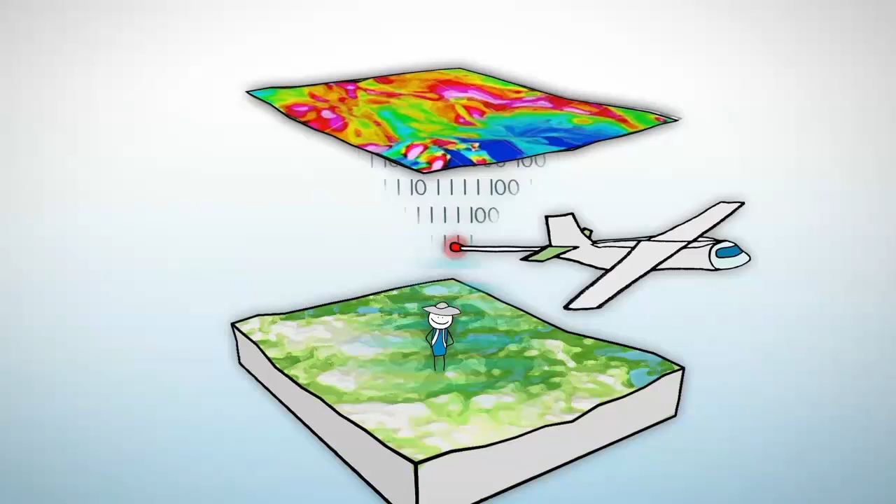Since the 80s, discoveries of surface mineral deposits have declined markedly, but emerging technologies and trends have facilitated the exploration of subsurface deposits. 3D inversion of geophysical data has become increasingly important in exploration because it gives explorers the ability to transform 2D magnetic and gravity data into detailed subsurface 3D models so they can really start to understand the structure and processes of what's beneath the surface.

Collaboration between geologists, geophysicists and geochemists has extended the capabilities of such mapping and analysis, allowing us to make the best possible exploration decisions. Inversion is a powerful tool, but until now, running inversions has been time-intensive, requiring massive resources and specialised expertise.

Some time ago, we began thinking about how we could enable every geophysicist working anywhere in the world to perform inversions in minutes, not hours or days. To meet this challenge, we created a cloud-based 3D inversion service called VOXI.

We streamlined our inversion algorithms, optimizing them specifically for the needs of exploration. We parallelized the process so that it could be scaled across large clusters to achieve the best possible performance. Then we turned to cloud computing to access an almost unlimited number of computing cores. And we organized the cloud so that every explorer can get their very own cluster on demand.

With VOXI Earth modeling, explorers with a regular internet connection can now run big inversions from the office, from a hotel, anywhere with a reasonable broadband wireless connection.

In building our VOXI service, we chose to partner with Microsoft and take advantage of the Microsoft Azure platform. Azure provides a scalable, state-of-the-art, globally accessible cloud infrastructure that we can rely on. The cloud service is efficient and flexible, scales on demand, and we can adjust the size of the computer cluster to suit the size of the inversion by spinning up clusters as VOXI customers need them.

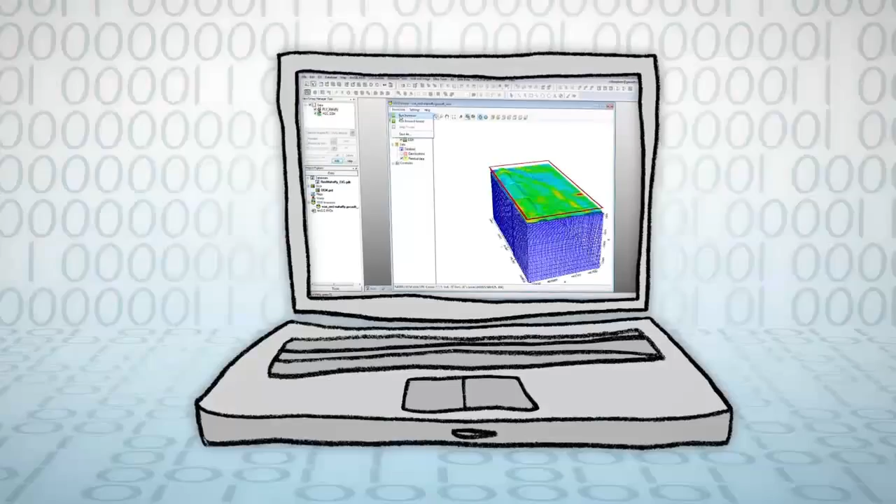VOXI is designed for practicing geophysicists, not just specialists. The cloud management technologies we've built into VOXI perform all these tasks automatically behind the scenes, running on our industry-standard Oasis Montaj platform. In creating VOXI, we thought long and hard about the way explorers work, so we designed a seamless workflow that makes it easy to integrate your results with other Earth science data.

Recently I was visiting a junior company in Australia that flies surveys and runs inversions. But because the horsepower required to run conventional inversions would bring the rest of the company to a grinding halt, they ended up running their inversions on the company's computers at night, hoping the system wouldn't crash before morning.

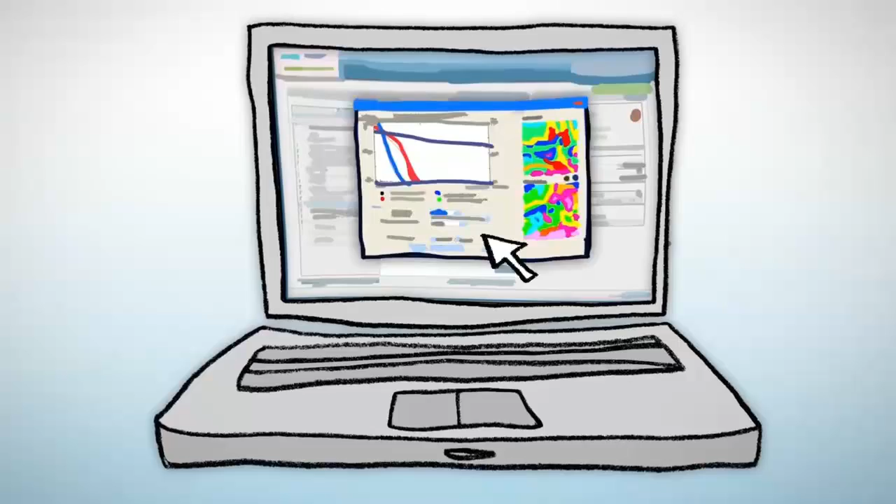With VOXI, data is prepared in Oasis Montaj. VOXI then moves the data to the cloud servers, which perform all the complex processing tasks in a fraction of the time it would take on a local computer. Results are immediately moved back to Oasis Montaj, where final 3D inversion models of the subsurface can be prepared.

Changes to the data and modeling parameters can be made immediately, and the inversion can be run again. This sort of rapid iteration and improvement is now practical. There's no upfront IT investment, no capital or maintenance expense for the server technology. You access VOXI only when you need it, and you pay only for the precise services you use. We think VOXI helps explorers do what they do best: explore.

Thank you, Ian. I'm now going to walk you through how to use VOXI in exploration for nickel.

To do that, I will use geophysical data collected over a property located in the northeast rim of the Sudbury Basin. The Sudbury Basin, located in Ontario, Canada, is a multi-ring deformed impact crater with a lot of associated economic mineralization. The mineralization happens along these rims as well as offset dikes that radiate out of the basin.

Let me now show you. In the middle of the map, you will notice the characteristic magnetic signature of the Sudbury Basin with its multiple rings and the offset dikes. This data was downloaded from the GSC website.

I'd like to draw your attention to the northeast corner of the basin, the Podolsky property. I will now zoom in.

This property is held by KGHM, formerly Quadra FNX. Quadra FNX conducted extensive work on the property. There is lots of drill hole information available, along with geological and geochemical information. As well, Quadra FNX commissioned Sander Geophysics to fly a gravity airborne survey in this area, as well as Aeroquest to fly an EM that had associated MAG.

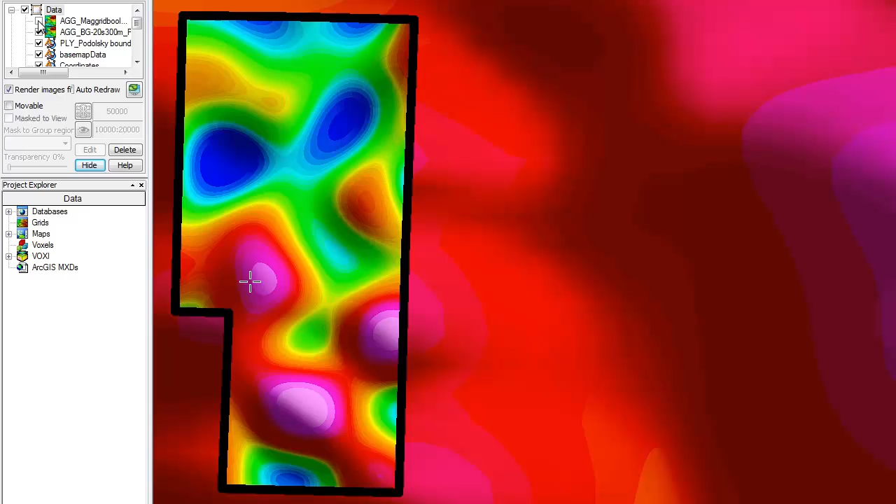And the map that you see on the screen is the magnetic map. Note that right here we have concurrent gravity high and magnetic high. We know that the nickel ore in the Sudbury Basin has an associated magnetic high. Also, the nickel ore is a very dense rock, so we would expect to see a gravity high.

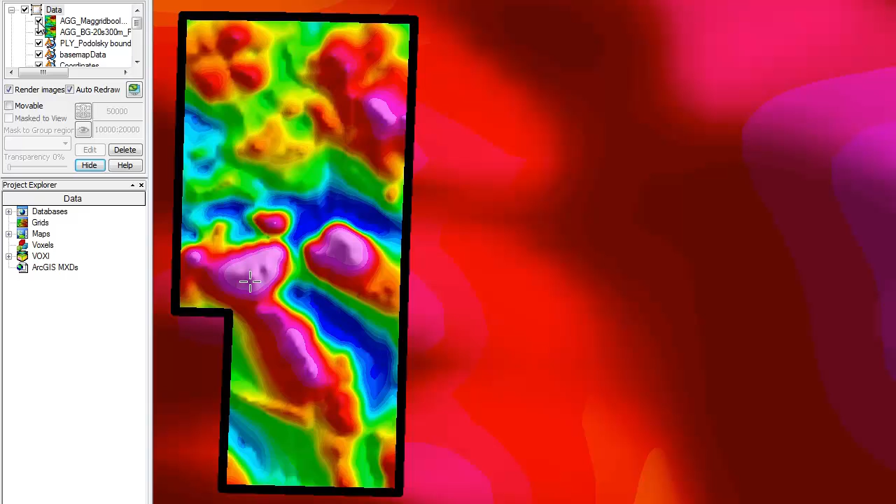Now, let's go and model this area. To do that, I will go to the VOXI menu. VOXI will appear in your Oasis montaj menu bar in the April 2012 release. I will choose the polygon option because I will draw a polygon around the area that I want to model.

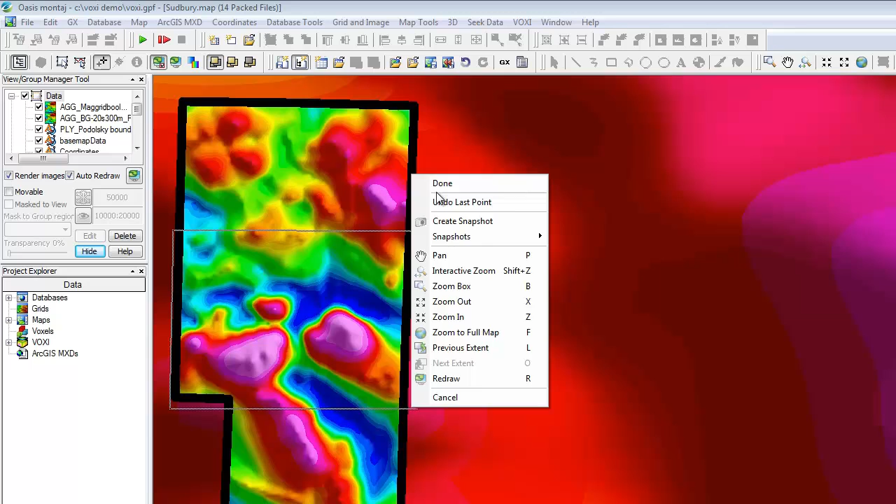Also, I will give a unique name to my inversion session. Before I move on, I need to define the digital elevation model. In this particular case, LiDAR was surveyed concurrently with the gravity. However, would I not have had this information, I could go to Seeker and download the digital elevation SRTM model for this area.

Note how VOXI has filled in all the other details for me. VOXI is geospatially aware, so it could pick up the coordinate system from the map and also propose a reasonable cell size for the modeling. Note also, I have the mesh size of the area that I will be modeling.

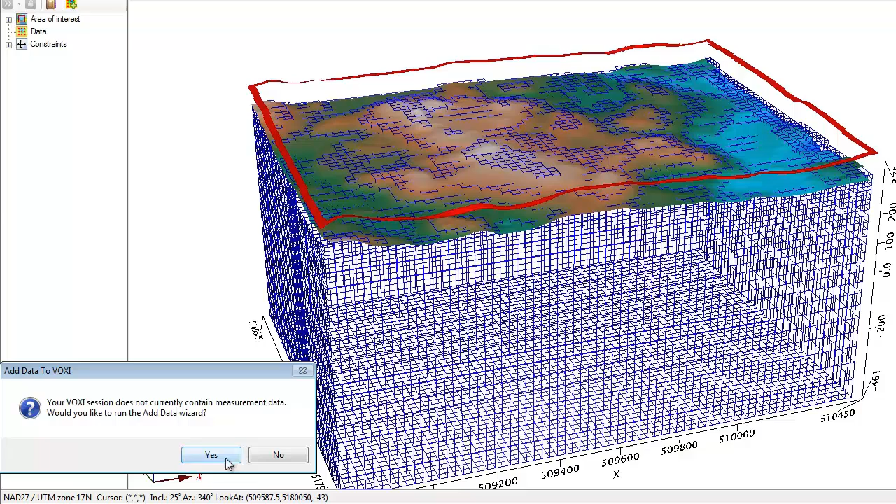Here we go. This is my model. This is the volume for which the susceptibility property will be calculated. I now have to provide the magnetic data that covers this area. I can provide the magnetic data as a database or as a grid.

I'll pick my magnetic data, and I also have to define at what elevation it was surveyed. Would I not have any radar elevation information? I can define an average constant elevation, but in this case, we do have the elevation.

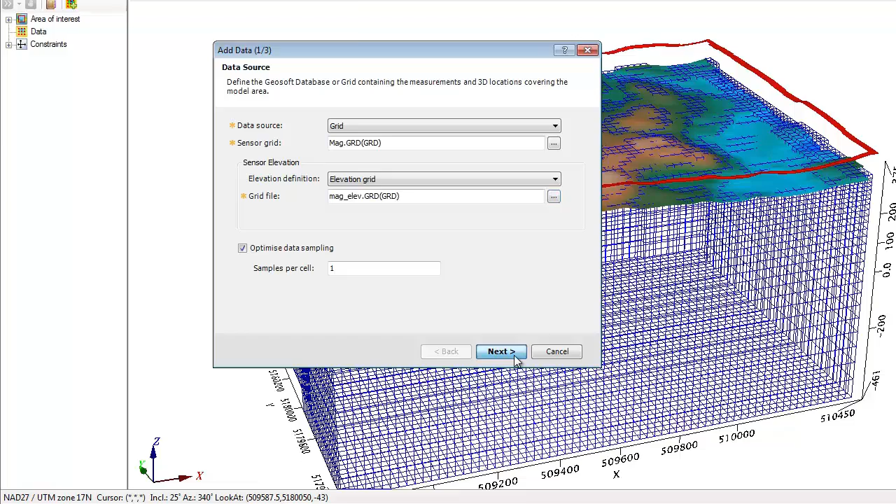Since it's magnetic data, we will be modeling susceptibility. Also note how, again, VOXI filled in details for me. All surveys have inherently an associated noise level.

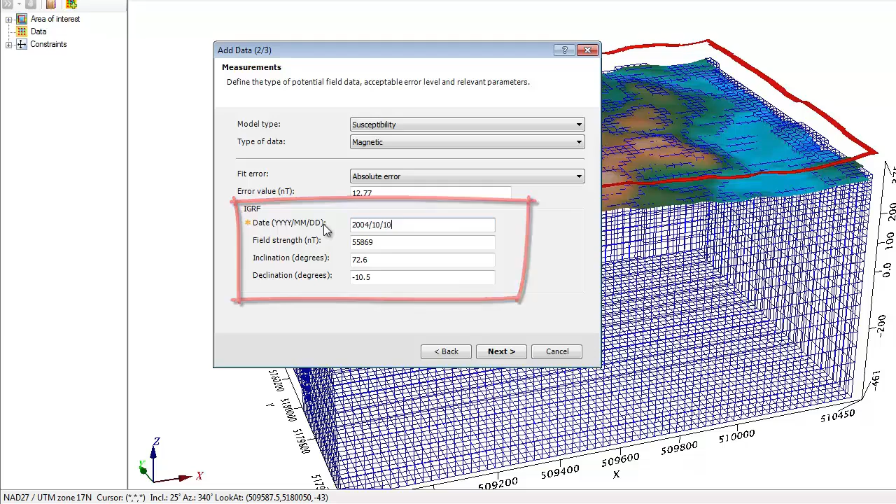Also, we need to know the geomagnetic field at the time of the survey in order to properly calculate the susceptibility model. And lastly, it is not really absolute values of susceptibility that we will be calculating, but rather their variation. So it is prudent to remove the background in order to better resolve the variation in the susceptibility.

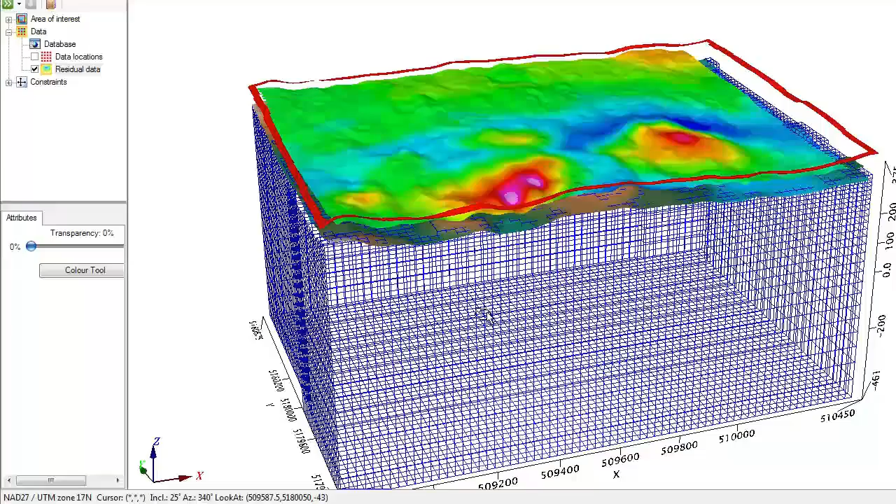I now see the magnetic data draped on the elevation at which it was surveyed. I am ready to go. I can go and model the susceptibility property of this volume of Earth.

All the magic happens right here. I am ready to run the inversion. Would I not have supplied all the necessary information, the run inversion would have been disabled. The fact that I can run it tells me we have all the information we need.

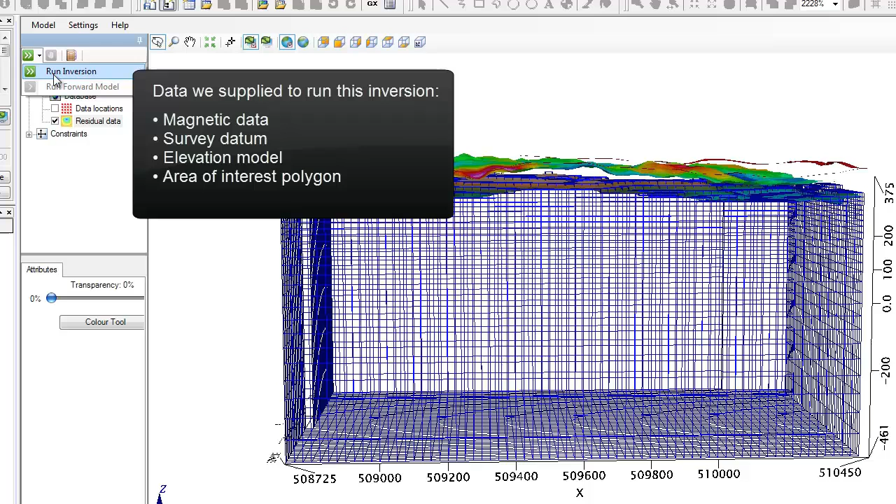Note, we supplied the magnetic data, the datum at which it was surveyed, the elevation model, and we defined the area with the polygon. Those are the only entries that I had to key in.

Ian, would you like to explain the token system, please? Okay, thanks, Elizabeth. What VOXI is doing now is it's calculating how many resources it requires to model this particular problem. Once it's calculated the number of resources, we present this dialog that tells you how many tokens it's going to require for us to run our cloud server on your problem.

This is a pay-per-use model, so everybody who has access to Oasis montaj will be able to use VOXI, and when they're presented with this, they can simply buy more tokens and consume them as they go. Once you accept the number of tokens, what happens next is VOXI connects with our cloud server. It will move whatever data is required up to the cloud environment for the processing to take place there.

Within the cloud, we spin up the number of cores required for your particular problem. The larger the problem, the more cores turn on, and then we run that problem as efficiently as possible. My own experience is typical models run in a minute or two, medium-sized models up to 20 minutes, and quite large models could take an hour to an hour and a half. Those are models that are really large by current standards. Our goal with the cloud is to limit the amount of time it takes to run and give your results back as quickly as possible.

The number of tokens needed to run an inversion is directly proportional to the number of points on the surface of the voxel model. I accept the cost and move on.

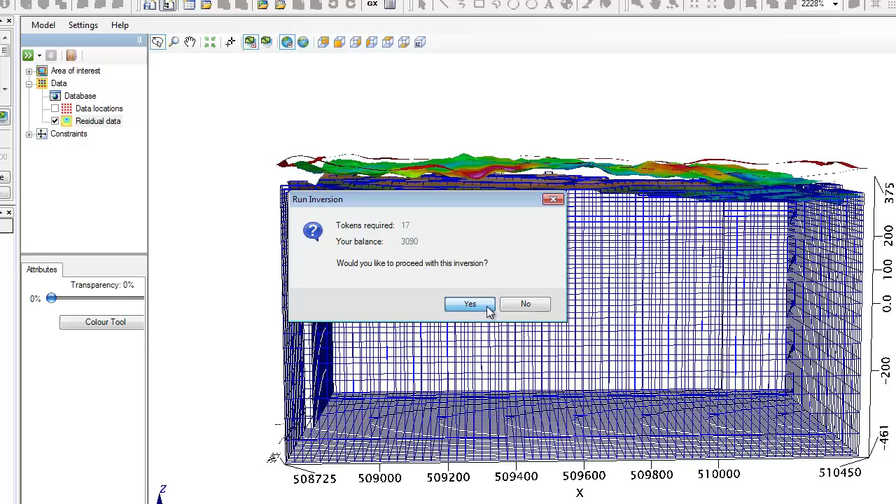The first thing that happens is that the data is uploaded to the cloud. Once uploaded, I can close my session and have access to the full power of my computer to do other processing. The computer is not locked for the duration of the inversion.

The next thing that happens is that the cores in the cloud are initialized to run the inversion, and then we start running it. This Earth volume has 161,000 points, and 8 cores have been triggered to run the inversion.

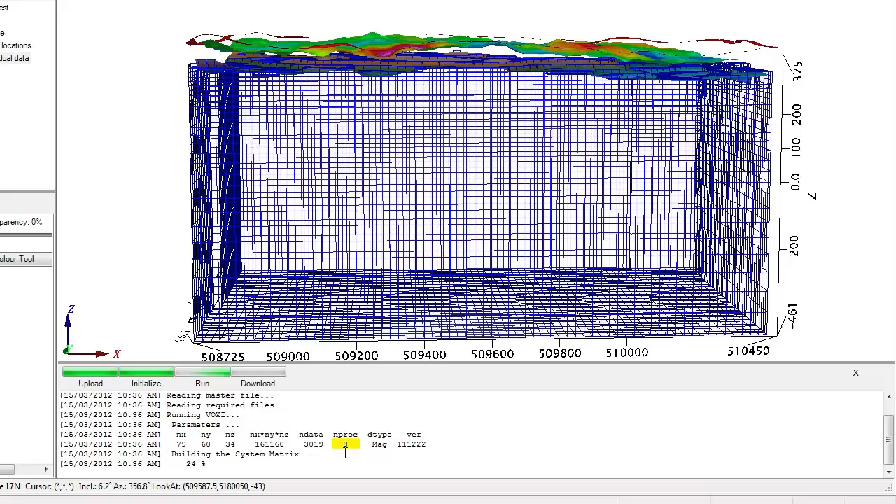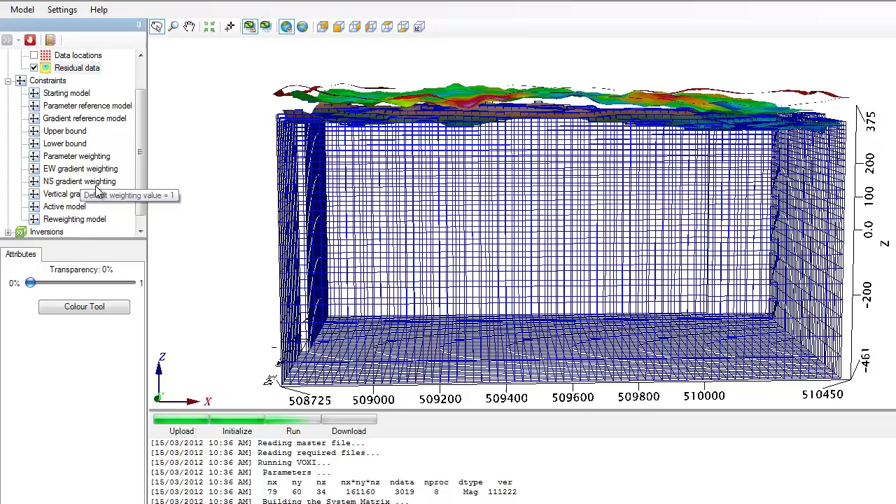While the inversion is going on, I'd like to draw your attention to the constraint item on the tree viewer. If you have a priori knowledge, such as thickness of overburden or any knowledge about the contacts, you can enter them as constraints to better control the results of your inversion.

The inversion item on the tree appears when we start running an inversion, and each inversion session gets a unique name compiled with the type of property we are modeling along with the timestamp when the inversion was triggered.

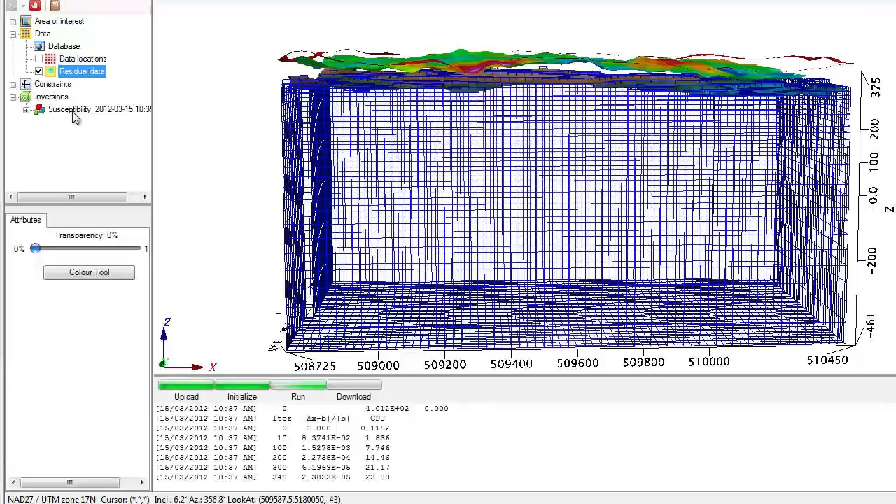The inversion is done. It started at 10:35 and ended at 10:38 — 3 minutes to run an inversion for a voxel model with 161,000 points.

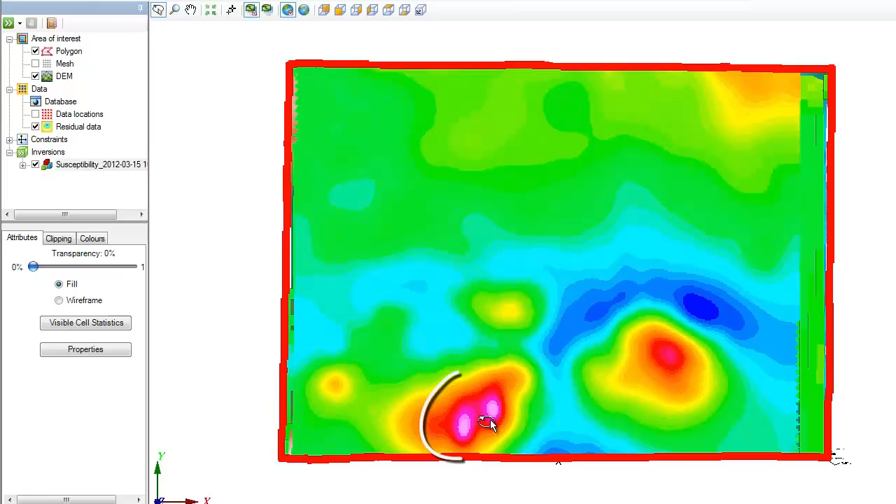I can close the progress log and turn on the susceptibility model. Let's turn off the mesh to better see the results. Note that we were specifically interested in this anomaly here, which had a concurrent mag and gravity response.

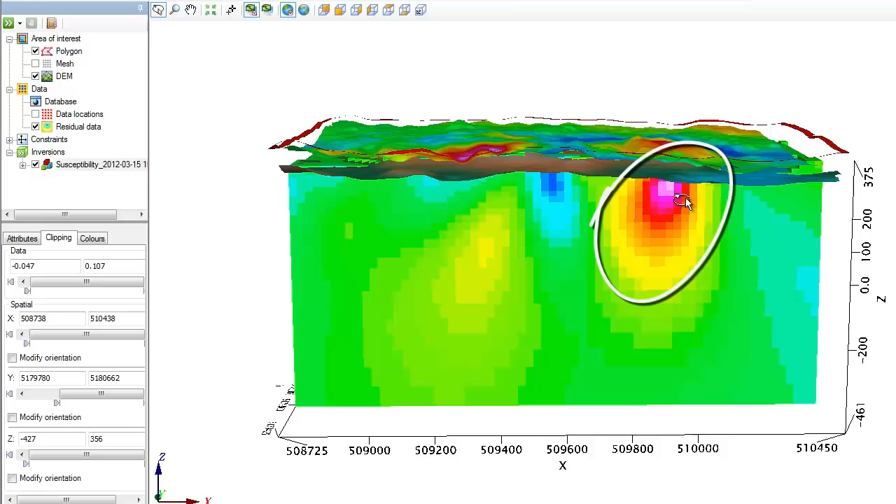Let me slice through this model. Right here is where the high susceptibility is concentrated. Although I have a secondary item located here, I'm not really interested in this high susceptibility area because I know it doesn't have a concurrent gravity high.

I will now clip the data to show only the high susceptibility areas. And here is a look from below.

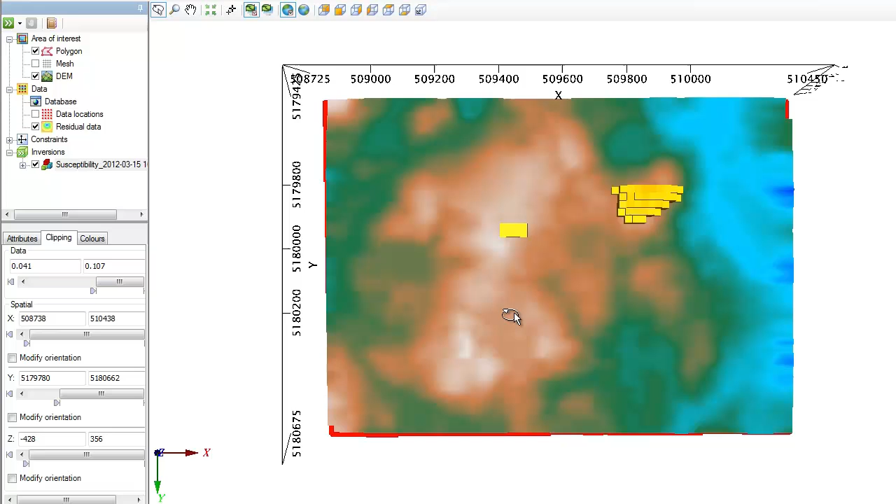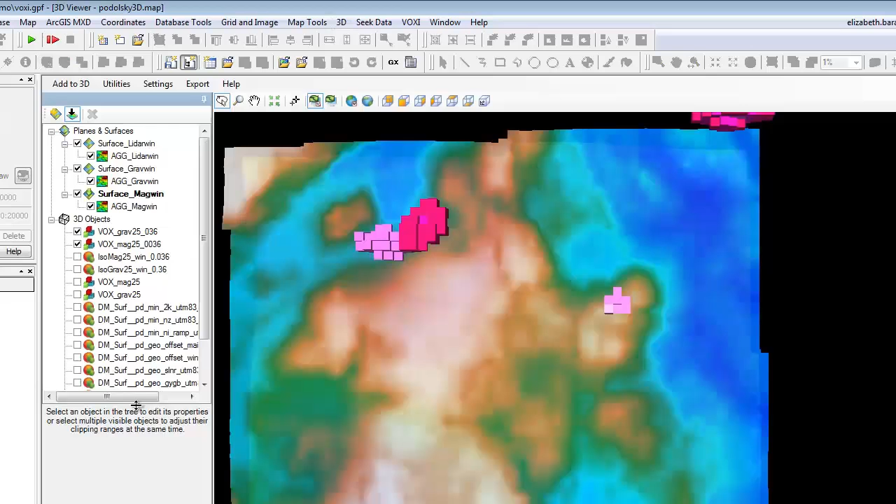In interest of time, I also modeled the gravity data and produced a map that has the gravity and magnetic inversion results along with other a priori structural information made available to us by QuadraFNX. Let me minimize this map and open the 3D map with the results.

Once again, here is the area where the high susceptibility shows in a lighter shade of magenta and the high density shows in a darker shade of magenta, concentrated together.

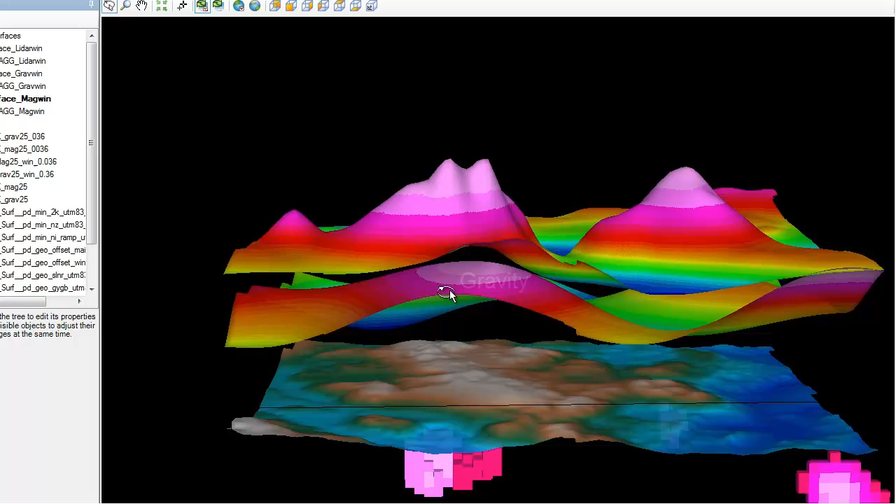What you see on the lower surface is the terrain. The middle relief surface is the gravity data put on its own relief so you see the highs very clearly, and the surface above is the magnetic data, also draped on itself.

Let's look at what happens in the Earth volume. I will turn off the voxelized high susceptibility areas and show them with isosurfaces instead. The orange isosurface is the high susceptibility, and the green isosurface represents the high density area.

Through extensive drill hole information, I have access to the mineralogy. As a result, a nickel ramp model has been built, displayed in blue. You'll notice that the high density and high susceptibility volumes coincide pretty closely with the nickel ore ramp.

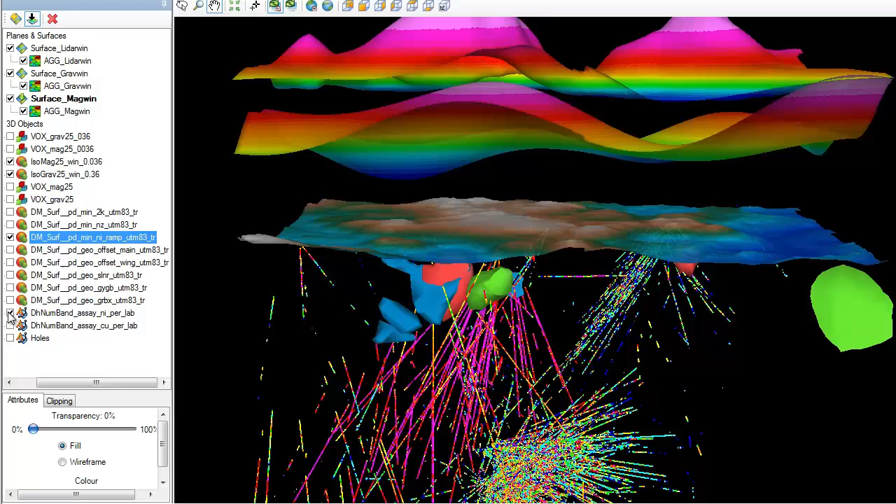Let me turn off the drill hole information to better see how these models coincide. I'd like to point out that we didn't impose any constraints here.

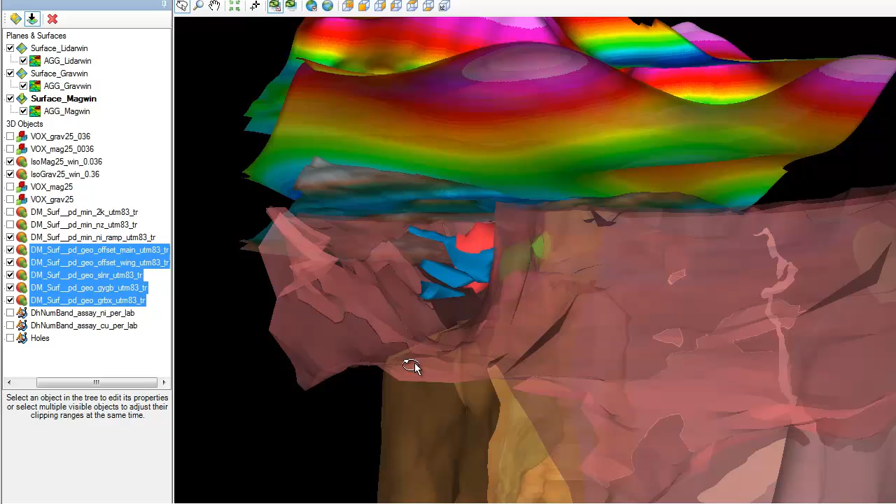Were I to take advantage of the other information made available to us, which is the contacts of the sublayer and the dikes, I could force the inversion to better coincide the high density and high susceptibility volumes.

I will zoom in now into the area of interest with the nickel deposit and rotate the model. This concludes the Voxy demo. Back to you, Ian.

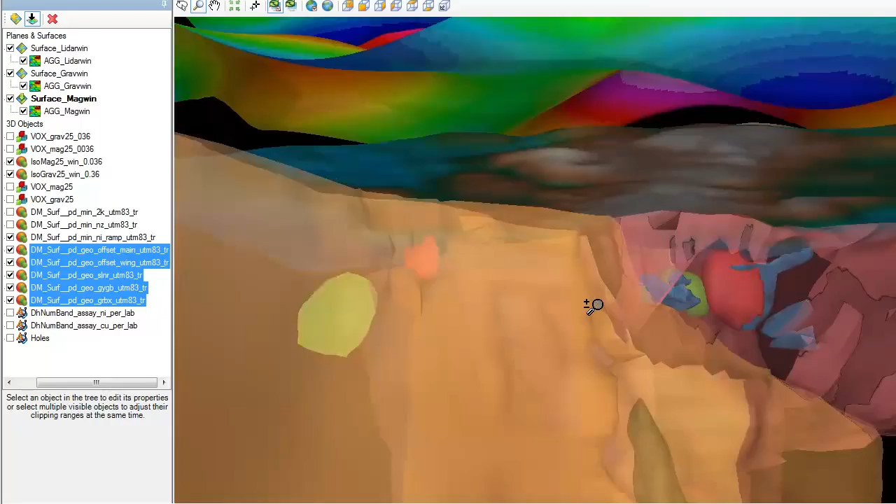Thanks, Elizabeth. I hope from that little demonstration you get an idea of the way we've addressed complexity, and the way we're using the power of the cloud to make this sort of technology accessible to everybody.